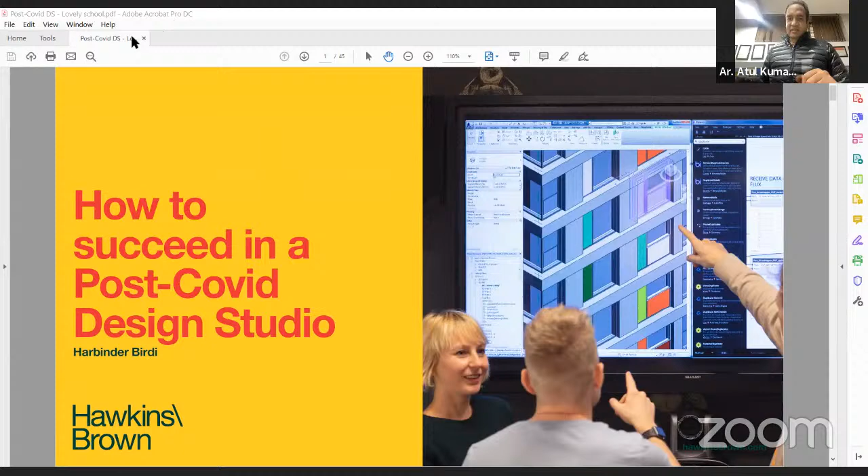Welcome, sir. Thank you very much, Atul. Okay, let me try and share my screen and hopefully this works. Can everybody see that? Yes. Fantastic.

I've got a short presentation, but I really wanted to spend most of the time having a conversation with the students and the School of Architecture. So hopefully what we can do is put on the cameras and actually have a conversation. I wanted to start off, I was actually in my graduate year when I was 22, I came to

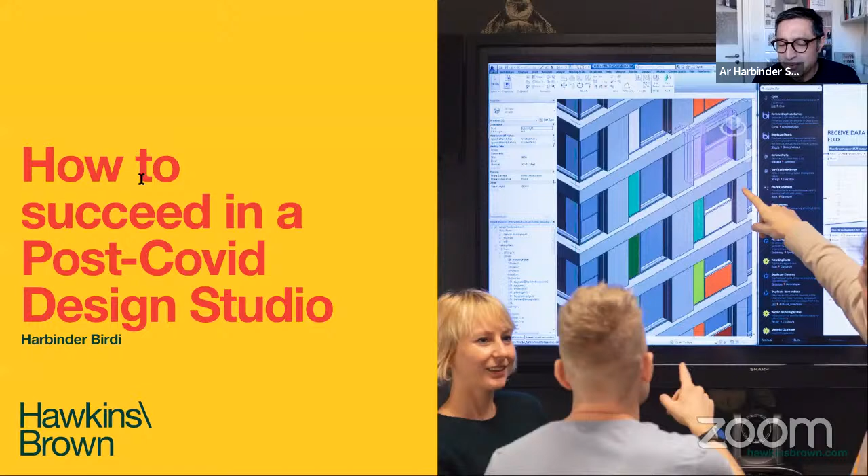work in Ludhiana, and I stayed with the architect Harbinder Singh in Ludhiana many years ago. So in a way I wanted to dedicate this talk to Harbinder, his wife Machachi, and their 3 children, Angad, Ruchi and Nidhi, who looked after me so much. He was my mentor from a very early age. So this is really dedicated to the family that laid the foundations for my career.

I wanted to start off by introducing ourselves. This is the practice. The projects that I'm going to show you were not designed by me, they were designed by my colleagues in the practice, and we're a practice of 300. Last year we were voted by the Architects Journal in the UK as being the best practice in the country, and we've gained that award several times. So we are in the top 10 practices in the country, but we think of ourselves as being very diverse.

The talk that I wanted to do was really talking about this image here. On the left is a picture of our London studio, which was in January 2020. Then literally overnight in March, we had to do what was happening on the right, where all 300 of us had to go home and work, and yet we still had to design and produce. I wanted to talk about what were the implications of that, but also how our clients now, and how we see the city being shaped based on us coming out of COVID.

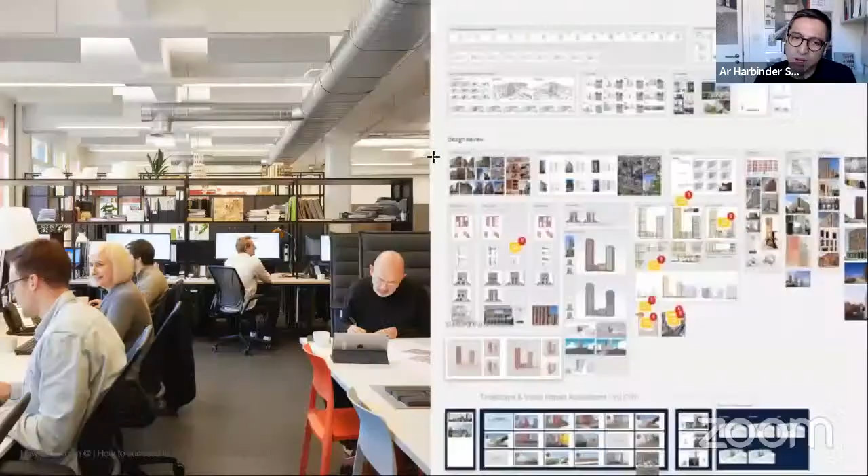In the UK now, we've actually come out of COVID in the sense that all the restrictions have been relaxed. The first thing was design. Historically, we were all expected to come into the office, which was the place of design, and we would all have a desk. Actually, what we've realized now is that generally in the UK creative industry, you're expected to come into the office 2 to 3 days a week in the main, but 2 days a week you're situated at home.

What we're finding more and more is that in terms of design exchange, before we would have physical pin boards, but now what we have is the Miro pin board - a digital pin board that everybody can display their material on. One of the interesting things is the authorship of that digital pin board, the quantity of material, how you navigate through it - it's slightly different from the physical pin board. So designers are going to have to grapple with how you bring the physical interaction of standing around a model to talk, to actually having a wider design team meeting with this virtual pin board, the Miro, and how you navigate through that. I think that's going to be really interesting to see as all industries around the world emerge.

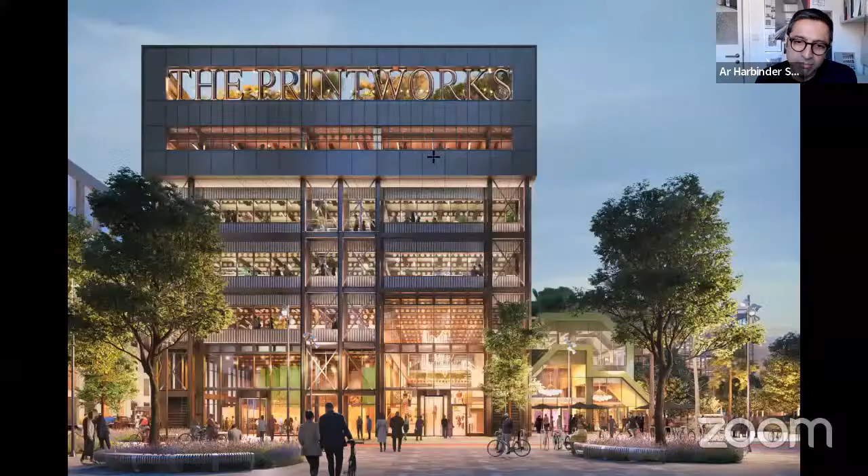But what about the workplace? Most cities - I think London, it's fair to say, out of all the city centres - was the most affected. That's because on an average day in London, 4.4 million people jump on the London Underground network, most of them coming into the town centre. And then that suddenly overnight switched off.

A lot of landlords and developer landlords were saying, well, if we are going to create a place for people to come to work 2 to 3 days a week, those spaces have to be amazing. This is a project we're doing called the Printworks, an old printing press in East London. Our developers now are saying they want to create places that will attract the best people.

Because globally, it's fair to say, in the pandemic lots of people reviewed what it is that they wanted out of life. There was something like 20% of people in the industry who either left, moved firms, or took time out. So a lot of businesses coming out of the pandemic have lost staff but are desperately seeking to find the best staff. One way landlords and developers are addressing that is by creating the most amazing working environment so that the best people want to come and work in your organization.

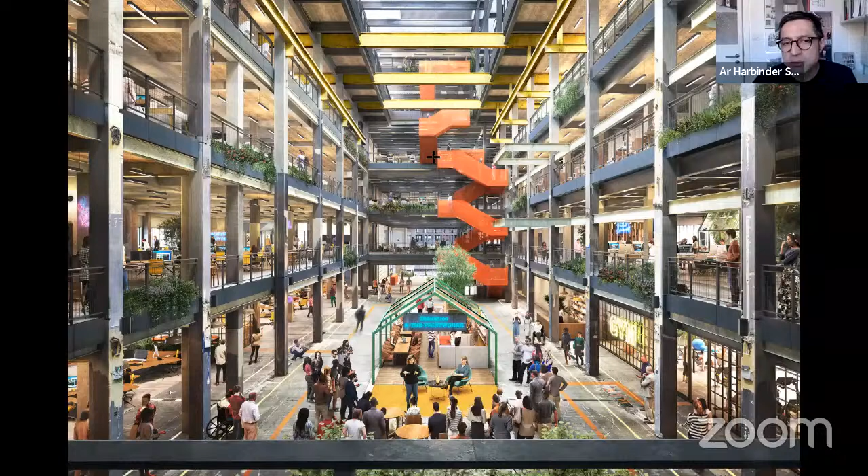These are the sort of places - because now, if you have focused work to do, the chances are you'll do that at home. So the workplace now is essentially a space for you to exchange ideas, for you to meet people. Most of the time when you're in the workplace, what you should really be doing is having lots and lots of conversations with your colleagues and your clients. That's what you should be doing.

What we're trying to do is create these environments, and I think everybody is still learning how they work. How much space do you give someone? Are there quiet zones? Yes. Are there spaces where you can interact? Yes. Are there spaces where you can have lunch? Yes. Are there spaces where you can relax? Yes. And how do you accommodate all of that into one building program? So we see that being the future of the workplace.

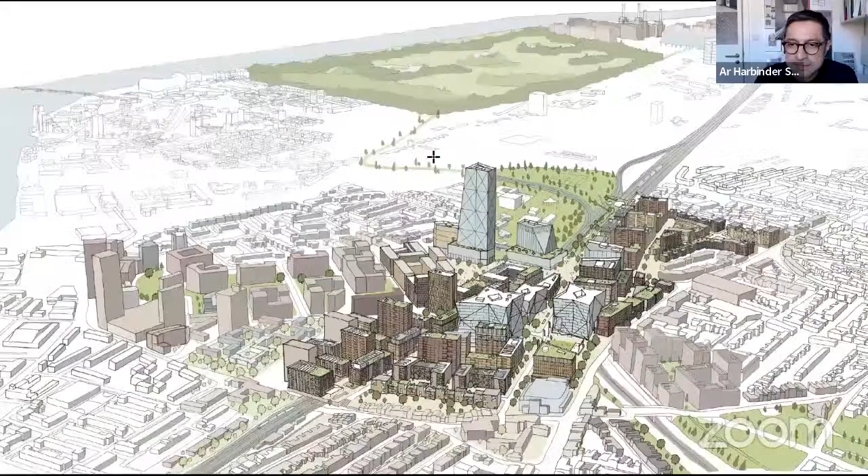And in cities, as soon as in London in particular, a lot of people decided to leave London and move to the countryside. They bought houses there because they thought with Wi-Fi, I can actually work now from home. What's happening now is that all those people are having to move back as they realize that actually the countryside and living in small villages isn't much fun. So what they're saying is that they really miss the city.

What we're finding is lots of local authorities, councils, and city mayors are looking to densify parts of the city, especially around transportation nodes. This is a proposal we designed for a development above a major station in London, Clapham Junction. More and more, local authorities, developers, and rail operators—I know there's a huge program of rail infrastructure proposed for India—are looking at density around the transportation node.

By doing that, the air rights above the public infrastructure can pay for the upgrade of that infrastructure, and it also means you don't need a car. At the moment, the big challenge for major cities is to keep cities flowing and invest in major infrastructure, but the car is essentially on its way out. So urban design is going to be key.

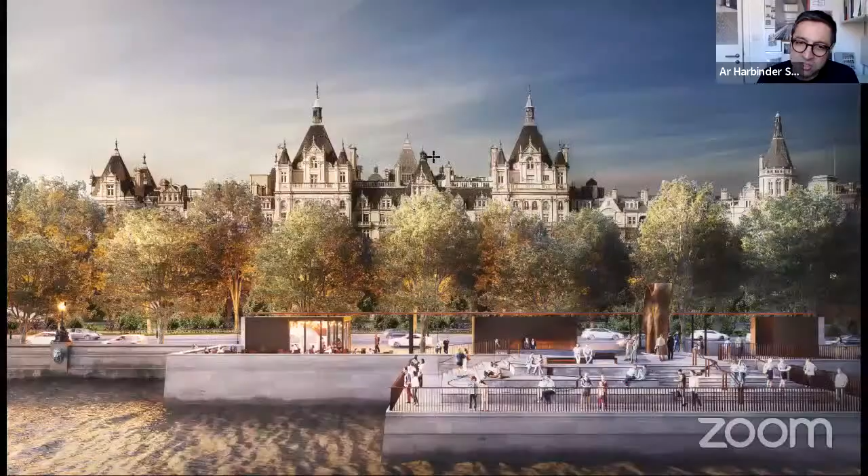This is one of the projects we're currently delivering in central London: the Thames Tideway Tunnel, a £4.5 billion new sewer network. This is a new piece of public realm we're creating in the Thames, which connects to the Bazalgette sewer, the old Victorian sewer designed by the engineer Bazalgette. When he designed it, London only had a population of 2 million, and that was 150 years ago. London now has 8.5 million people, anticipated to grow to 11 million.

But the sewage system can't accommodate that. Currently, when it rains, the sewage actually goes into the River Thames—something like every other day, raw sewage goes into the river. So this new project, a new sewer, is being designed. But I wanted to show this because it's about the public realm.

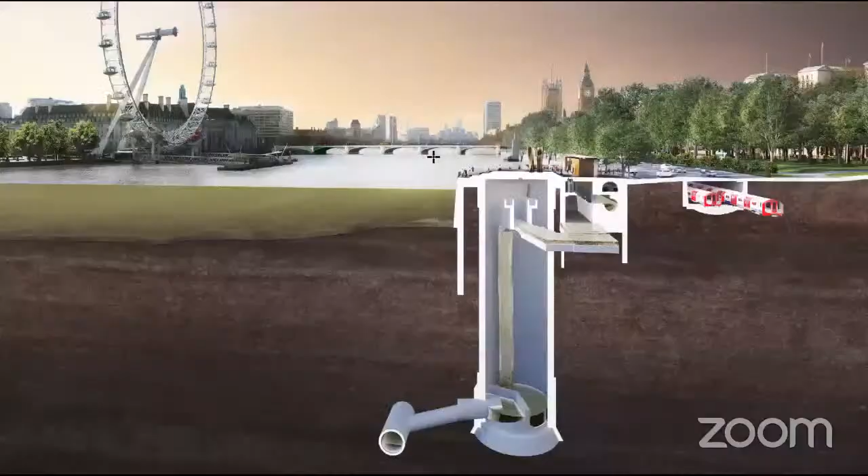Beneath that, this is a section. You can see on the image on the right, that's the underground line, and this is the area Bazalgette designed—the old sewer. He actually created a small zone there for the utilities and gas. This is the new super sewer: a 7-meter diameter tunnel running from West London, where I live, all the way to East London, where all this sewage will be treated. It's situated beneath the River Thames.

But as architects, what we're doing is creating these new public realms at the moment. I think the public realm is really important because two years ago, during our first lockdown, the only thing we could do was go to the shop for food, and we were allowed a 60-minute walk. That's all we could actually do. I think the public realm now is key.

We found that people started walking more, cycling more, spending more time in parks. Suddenly all the planners, local authorities, councils, and city mayors realized the value of the public realm. So now they're slowly making the roads smaller for cars but greater for cycling and walking. Consequently, we're cleaning our air as well. With the electrification of buses and cars throughout the globe, we'll have fewer cars on the road, but they won't be as polluting.

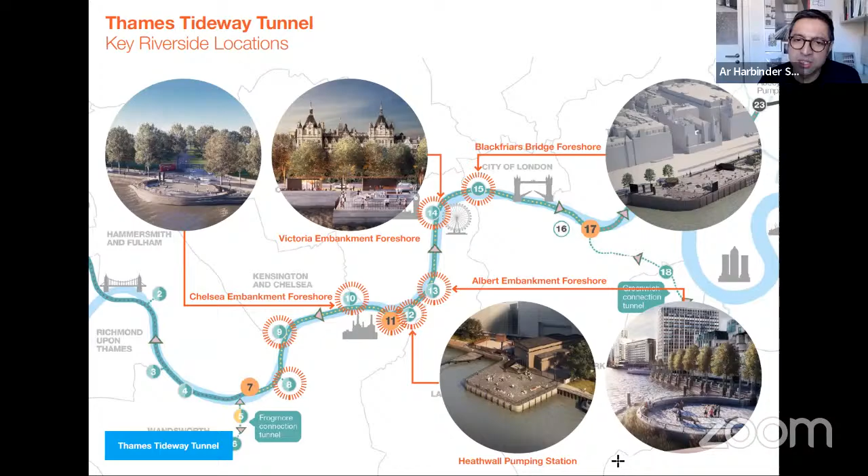But I wanted to focus on this: a bridge we're designing for Network Rail, the UK's rail operator. What they wanted was an innovative bridge that will allow you to cross the tracks.

So this is like stairs and lifts that would cross the tracks. I know it's something Indian Railways is looking at, because you haven't got safe crossings, and many people die when they cross the tracks on the Indian network.

Currently, the bridges we're designing for Network Rail are all individual. We were commissioned by Network Rail to design one typology of bridge that could be fabricated using component parts and literally repeated throughout the country. It's almost like the Brompton or the Dyson of bridges, and it was 40% cheaper than the bridges they were originally designing.

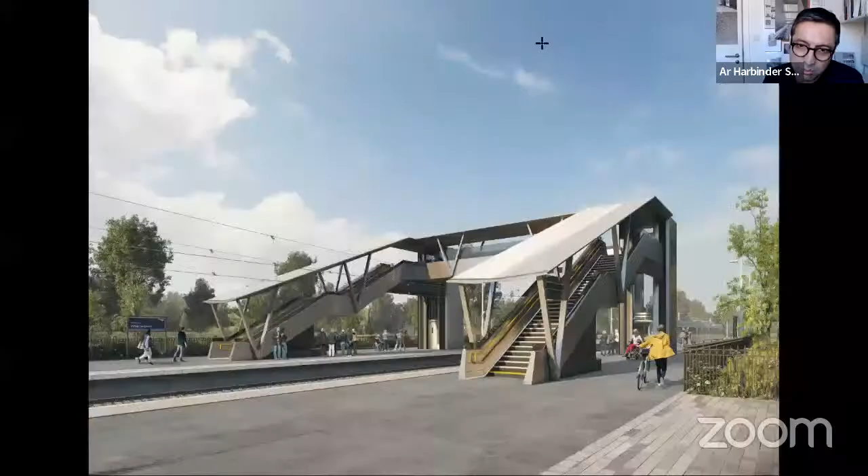This was a picture showing a mock-up. What we tried to do was make the bridge using very small component parts that could be laser cut using any fabrication plant anywhere in the globe, based on the design we could export digitally. This is the design of the bridge we're currently trialing. We worked with a specialist lift supplier who designed a bespoke lift, cut and made out of stainless steel. It's made out of stainless steel because it's very robust, but the maintenance is very low, so the life cycle cost in terms of embodied energy and renewal is a lot shorter over a longer period of time.

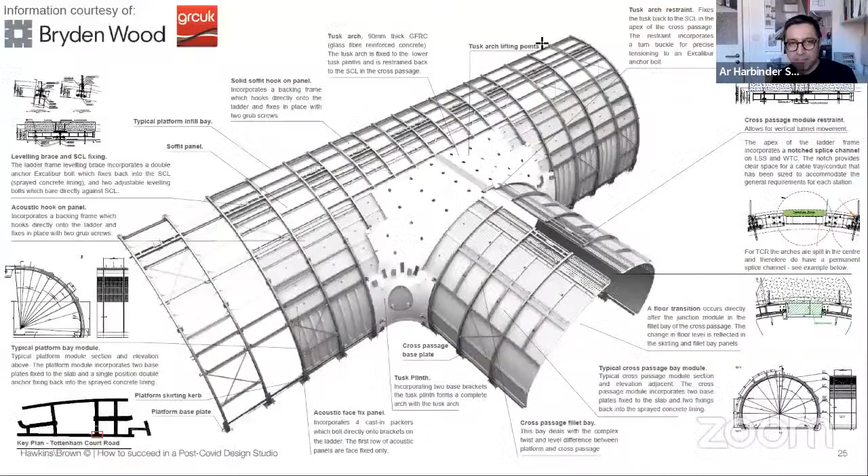Typically about 25 to 30 meters underneath London. But I wanted to really talk about this cladding, the platform cladding you saw. We developed that with a contractor, a fabricator, and an engineer. This was the original design given to us—the actual cladding panel was 25 mil thick of sand cement. By working with specialist engineers and fabricators, we managed to reduce that to 12 mil, which is a phenomenal amount of savings, across 6 stations. So we managed to engineer and make the product a lot more.

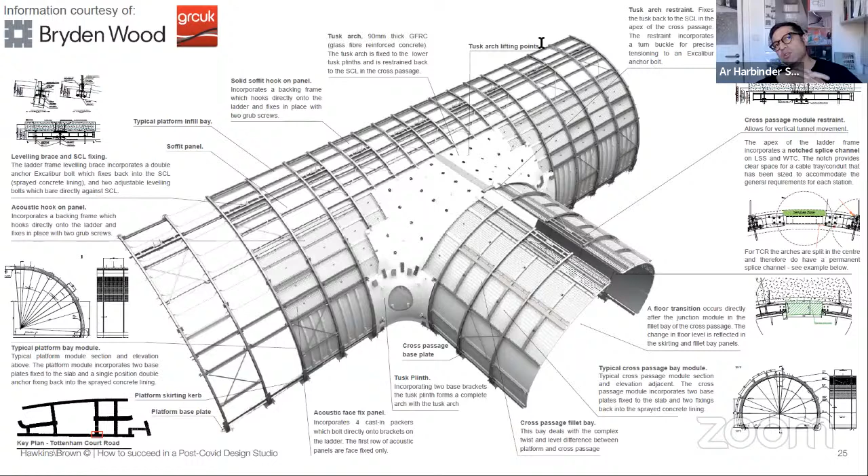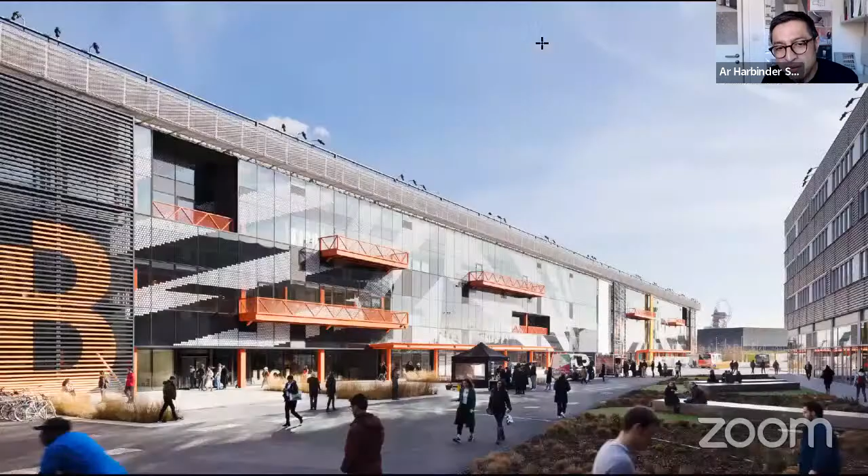After the Olympics finished, because it's only there for like 6 or 7 weeks, they said, what can we turn this into? So a developer approached us and said they wanted to make this a new creative hub within East London. So we kept the frame and delivered this. We took the cladding off, which was metal, and put a glass skin on it. We really wanted to animate it, almost dematerialize it in a way, to give it more of a human scale.

You can probably see the fritting, the little white fritting diagonally. That was inspired by the warships that Picasso painted in the First World War to camouflage them. We saw this huge structure and thought one way of maybe dematerializing it was to use the same sort of artistic conceptual principles that Picasso used.

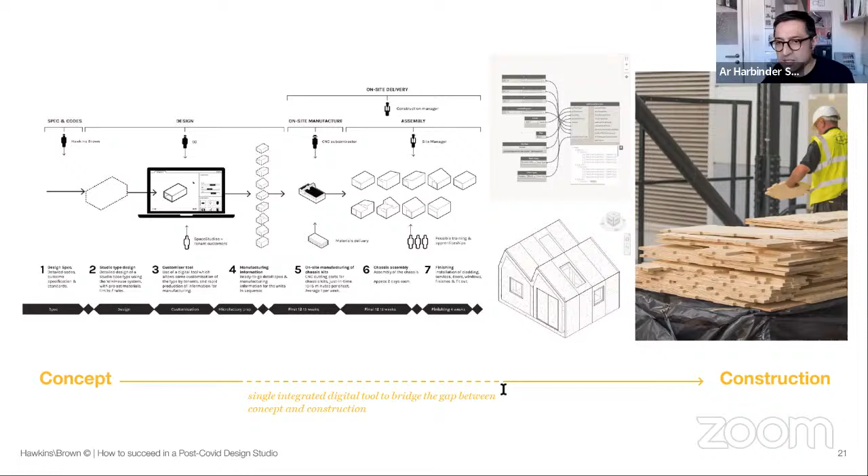One of the things I wanted to do was use our team of digital scripters. They're architects who studied architecture and design architecture, but I always say they spent far too much time as children playing Minecraft. Now they write code that can develop component parts which can then be fabricated using CNC machines, and then assemble bespoke structures. One of the things we did was this.

We currently are really pushing ahead. Boris, our Prime Minister, is desperate to make the UK in particular, and bring the rest of the EU and others on board, to make us as environmentally friendly as possible. I think everybody's seen the change in weather patterns, but what everybody's grappling with is what is the way forward.

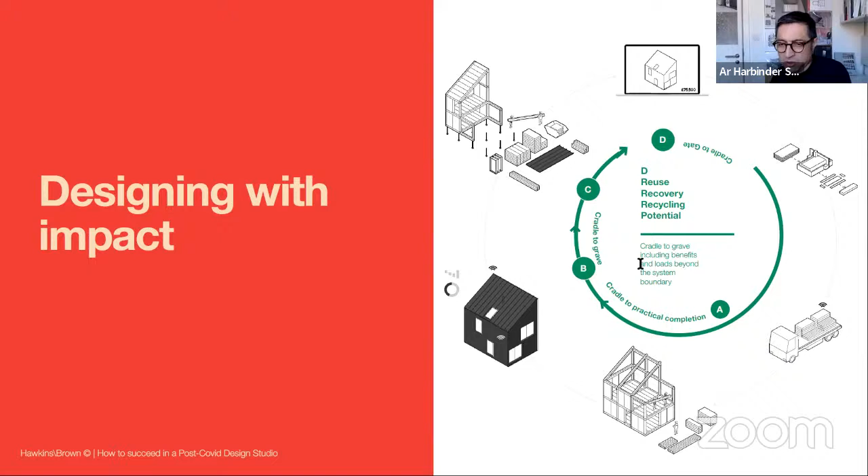So it's cradle to grave, and we're measuring all that now. One of the things we tend to do as a practice is say, if you need a new building and you've got a building there, can we at least try to save a bit of that building? And one of the things we are doing is measuring the embodied energy that's within the existing building.

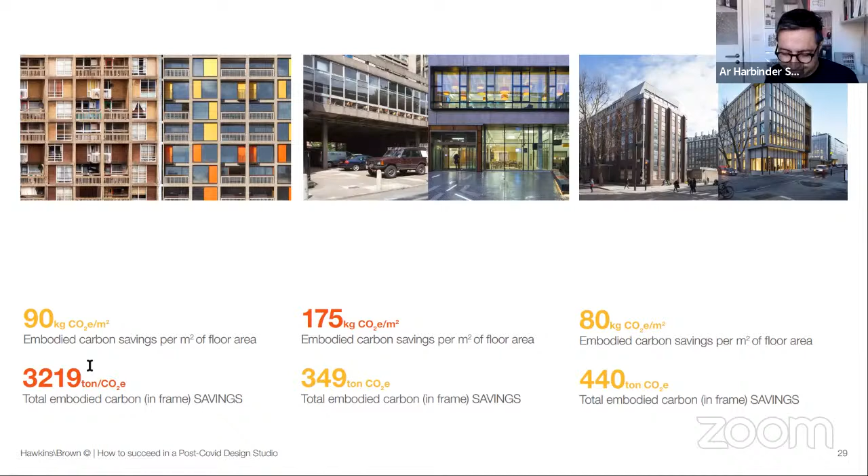We've designed it so that at the end of its life, we can reuse the timber. That's a really big point when using timber - always make sure you have a life for it afterwards, because if you burn it, the carbon goes back into the atmosphere, and if you let it rot, the carbon goes back into the atmosphere. So what you really need to do is repurpose the material you've got. But the beauty of this, and what engineers really liked about it, was that by using timber, it's a light super frame.

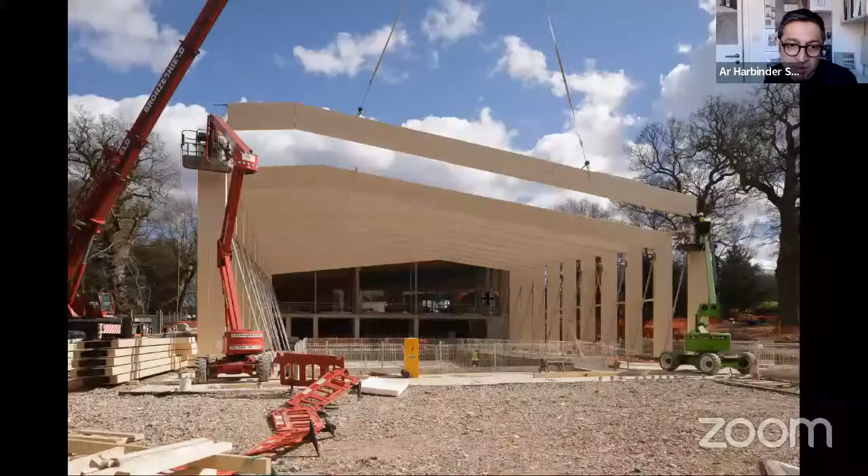This is the project, the swimming pool being slowly erected, really light. We designed this offsite digitally. It was cut and fabricated in Europe, shipped across. It's only because in Norway they have an abundance of this species of larch, and then delivered on site and erected very quickly.

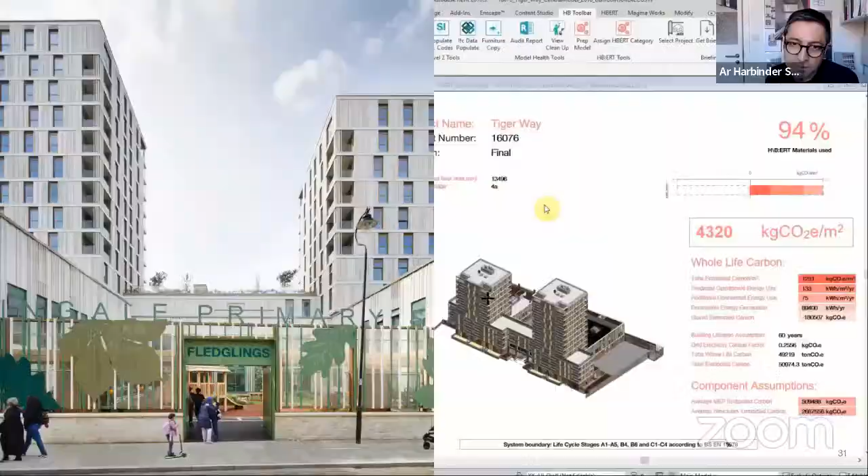This is a school that we designed, and there used to be an old Victorian school on this site. The local authority said, is there a way we can get a new school but also provide housing as well? So a developer approached the local authority and said, I will give you a new school, build you a new school, if you allow me to build accommodation above.

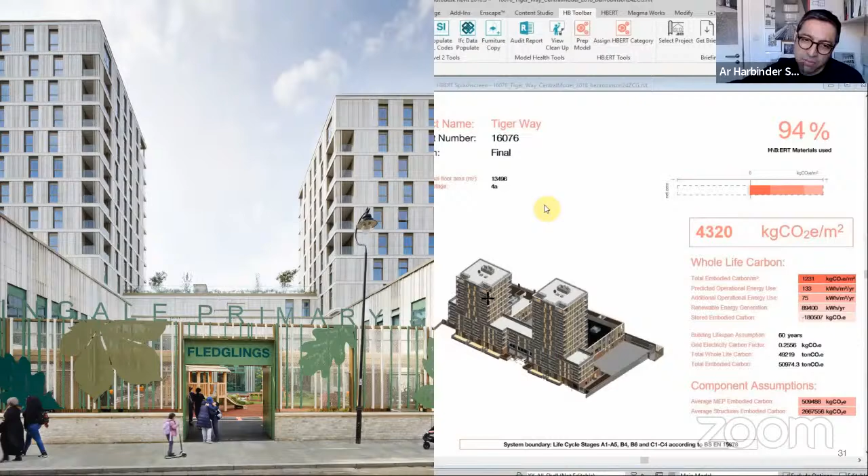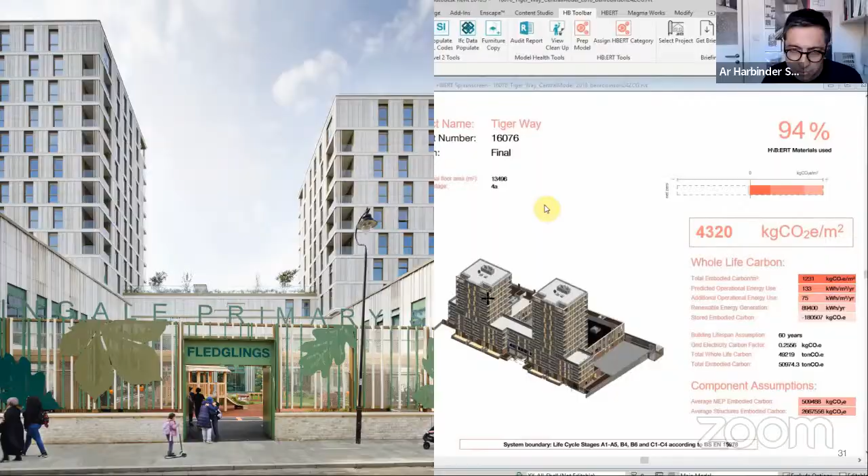With the software we've developed using Revit, our H\B:ERT tool, all plugged together, as we were designing the building we were able to quantify in real time the embodied carbon, not just for its construction, but also how much energy it would use for heating and lighting the building. So this is looking at the cost of how much energy the building will consume over its 60 to 70 year lifetime.

What we're finding more and more is maybe what communities in Hong Kong have done for a long time, this layering of program from schools to office to housing, all into one dense development. That's because of a limited supply of land. Whereas here, there's efficiencies to be made, especially as city centers become more dense. Historically, 10 years ago, the thought of building a school underneath apartments in the UK would be unheard of. But now, if the right partnerships can be brought together, they can be achieved.

And this school, which is a state school, is the highest spec state school in the country, paid for in the main by the developer.

This is our mayor, Sadiq Khan. I think it's fair to say his legacy will be how he's making the air in London cleaner, by making it very difficult for very polluting vehicles to enter the city. That's a really good thing. It encourages people to buy cleaner vehicles, and to walk, cycle, and use public transport.

This is him visiting one of our buildings, a social housing project in central London in Camden. It's social housing, but designed to passive house standards. We have, in a way, the opposite challenges to India. For us, the big challenge is to keep the heat in. In India, it's to keep the heat out.

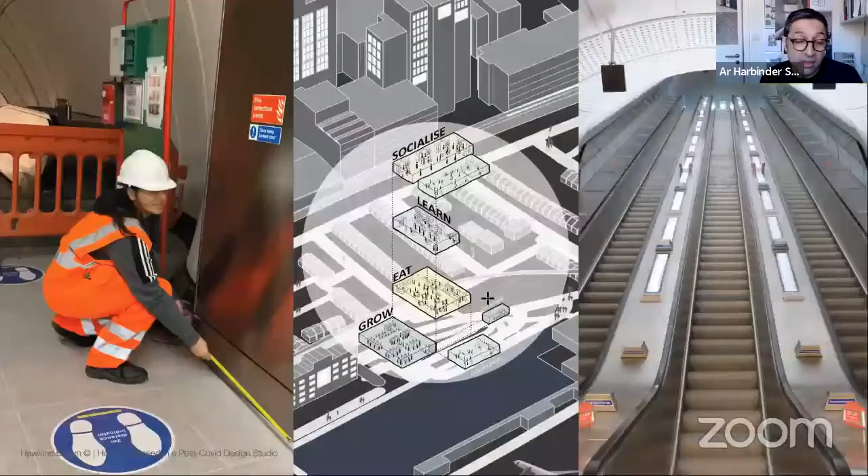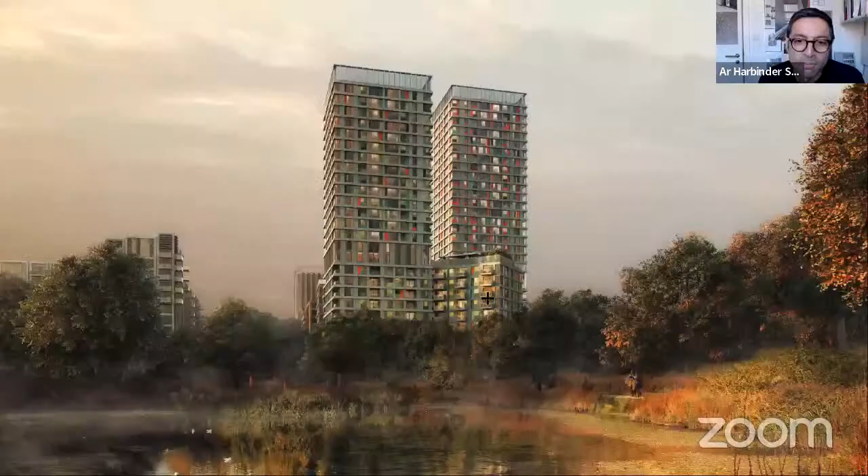I wanted to talk about our role as architects in the industry, especially with the reliance on technology. When I talked about Here East — this is one of the residential blocks we're currently designing in the Olympic Park as part of the big master plan, looking at densifying and building more homes because of the housing need in London. In the UK we have a population of 70 million and need 300,000 homes every year; in London alone we need 50,000 homes a year.

One of the things we wanted to do was express the character of the area through the facade, using colour.

I think one of the things, and I'll probably be told off by a scripter from California, is that color is very subjective. I think what you need is architects and designers to be able to discuss and debate color and its appropriateness. So this is a color palette, a mood palette that we put together, looking at colors within the local environment.

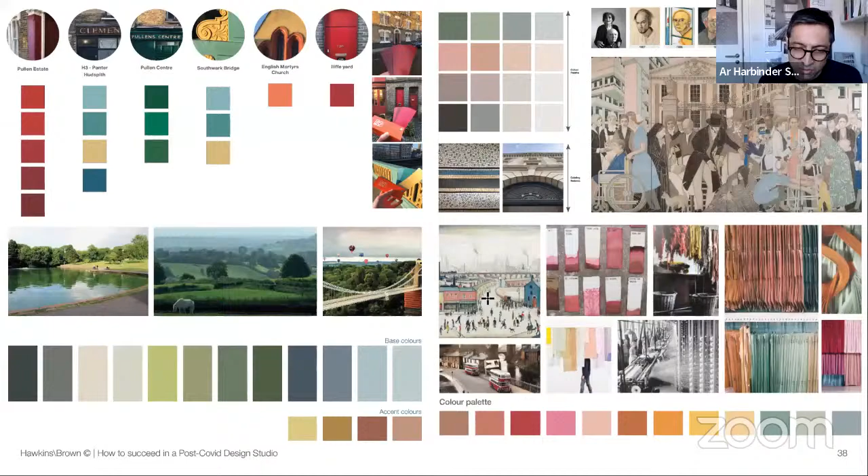Then what we did is lift some of those colors for us to animate the facade. But it was done by people. So these are our architects and designers actually looking at color. What we did is get our scripters to create an algorithm.

That allowed the various colors to be almost painted onto the facade of the building based on the colors we chose. We'd work with the scripters to moderate and modulate where the colors might be, but essentially the final decision of which color was done by people, right? So technology is great, but the narrative given from us as designers is probably more important than ever.

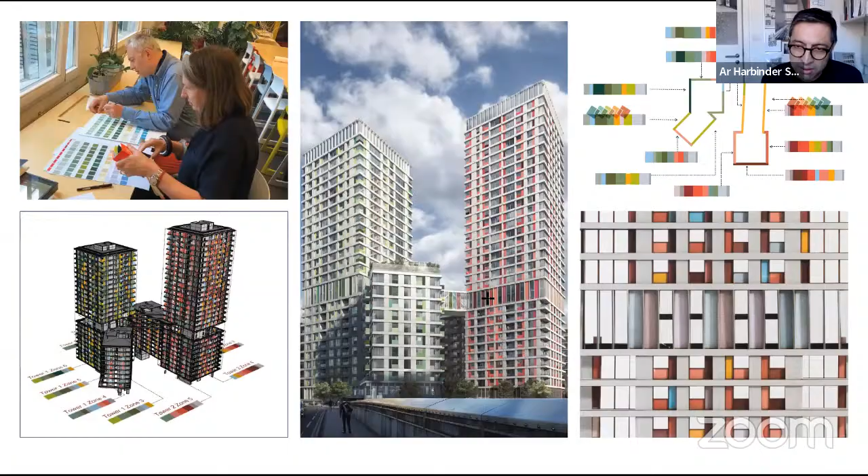So what we're finding now is that we have to automate that, as there is a labor shortage. In the UK in particular, what we're doing is looking at efficiency, waste, speed of construction, safety. All these things are being done in a cross-discipline, cross-industry-wide way.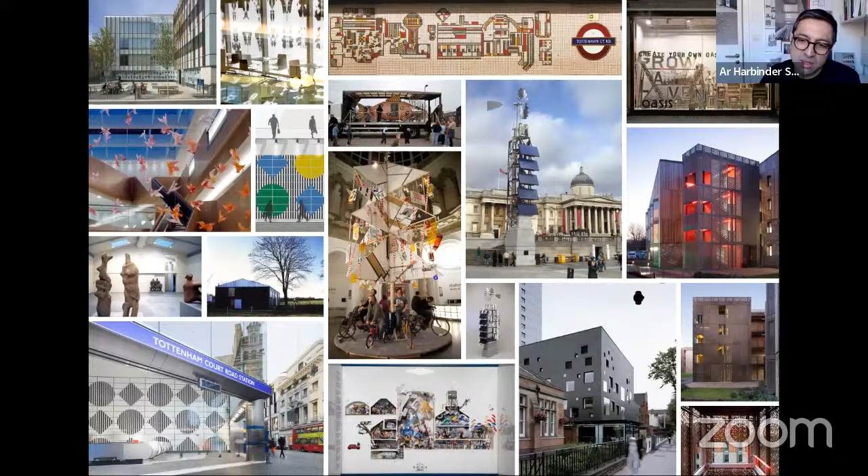I think what is interesting now is the stories that we tell about our buildings and the various collaborators we bring to tell those stories. It's something we find deeply rewarding across projects, across all of our sectors, simply because of the conversations that you have.

I'd urge, I know that in this School of Architecture, lovely school, it's part of an interdisciplinary school of architecture, I always urge graduates to talk to creatives who are not from the discipline they're studying, because when you start practicing, that'll be very much part of the ecosystem that enables you to deliver some of the buildings.

This was a project that we did, housing in central London. This was the Peabody Estate, and Peabody have for over 100 years delivered housing, social housing. We designed one of their developments in central London, but one of the things we wanted to do was tell the story of the residents.

One way we did that was creating workshops with the residents and working with an artist. What they did was create these pieces of artwork on the facade of the residential homes.

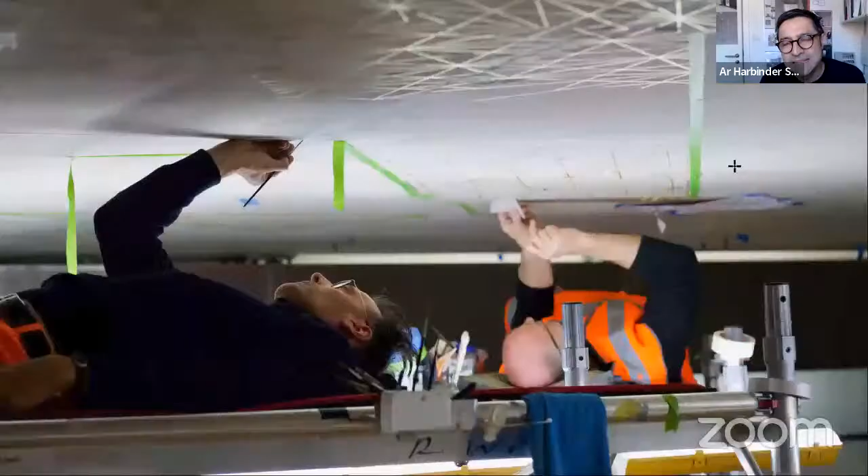I think what was interesting was Richard's take on how he sees people of the city using the station. What he was saying was, why create art that's so ephemeral? In the London Underground network, where we're constantly rushing around, we wanted to create art that will make you stop and pause. What I find really interesting going forward is seeing how our architecture shapes the way we move through this city, as we all now see the city differently.

Thank you very much.